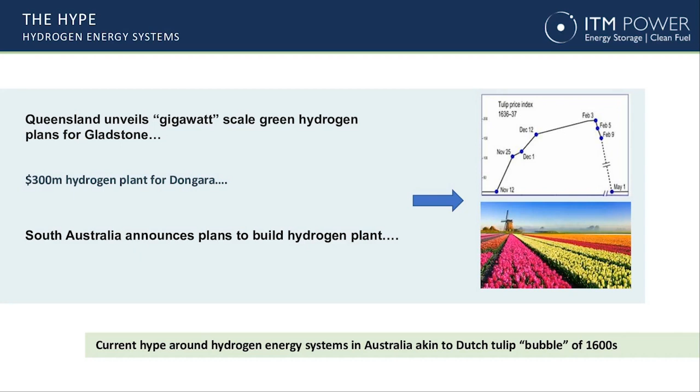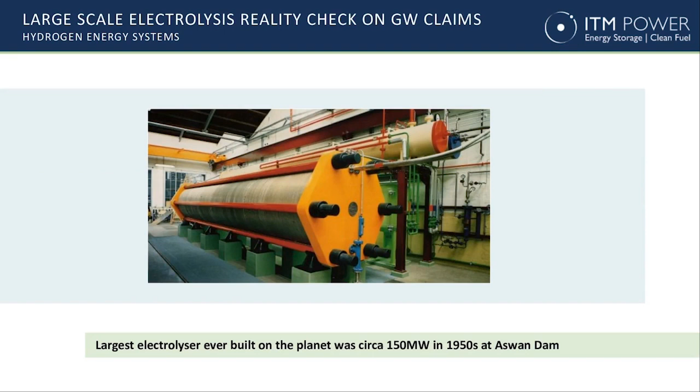Quick introduction: we're now part of the Linde Gas group as of 3 October last year, so we're proud to be part of the Linde family, which also includes BOC Australia. One of the things I want to say up front: there's been so much hype around hydrogen in the Australian market that we need to calm down a bit and take stock of what's really happening in Europe and USA, and learn from best practice. Let's not get carried away, as we've done in some of the press recently, about gigawatt scale projects, which frankly aren't feasible at the moment. In fact, the last gigawatt, or anything close to hundreds of megawatts, was actually developed in the 1950s - an alkaline electrolyzer at the Aswan Dam. So please take note of that, ladies and gentlemen.

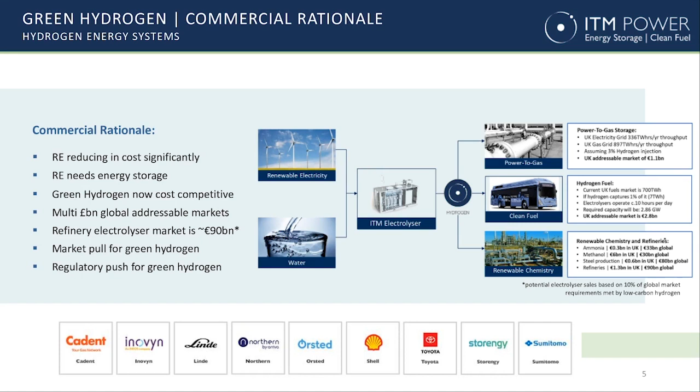What do we do? We make the white box shown in the middle of that slide, and we're pleased to make that equipment for people such as Toyota, Shell, and others around the world. There are very high standards in the oil and gas industry we have to meet for producing hydrogen on site through electrolysis. Basically, we're taking renewable energy and wastewater, preferably, and turning it into hydrogen gas, as well as oxygen and waste heat. We do 3 things with that: we generally put it into gas networks to decarbonise natural gas; we use it in our mobility fleets - cars, trucks, buses, ferries, and I believe Linde Aviation shortly; and renewable chemistry, using it to make other chemicals such as ammonia. As I said, we've been working in this industry for clients like Shell for 2 decades.

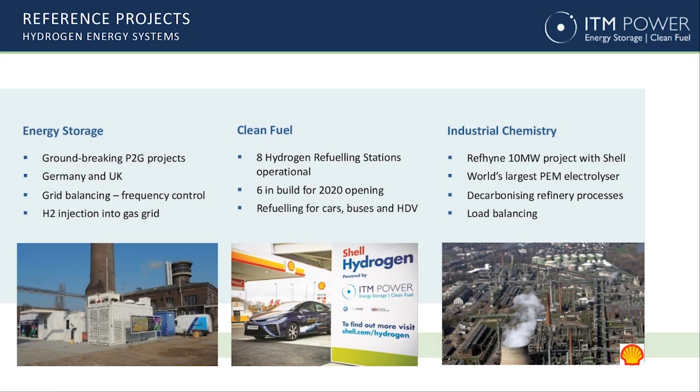I guess the first decade was about R&D and the second decade was about commercialisation. So again, we've got reference sites around the world in power to gas on forecourt refuelling stations, and now the largest electrolyzers in the world at the Shell Wesseling Refinery in Germany.

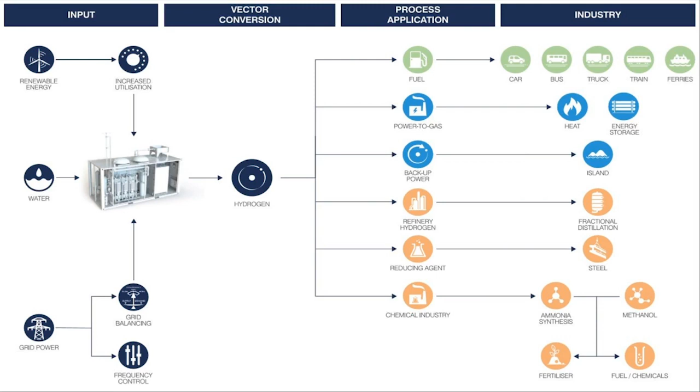This slide gives you an idea. People refer to hydrogen as the vector coupling molecule. Unlike an electron, we can reach a lot of industries and decarbonise and also help with the economics of those industries. As I said, we were part of the Linde Gas Group as of October last year, and thanks to their investment, we're building the world's largest electrolyser factory that I would invite you all to post-COVID for the launch. But at the moment, we're all stuck in Sheffield, and that's manufacturing around 1 gigawatt of PEM electrolysers a year. So Chief Exec Graham Cooley wasn't to be outdone by Elon Musk, so that's our gigafactory.

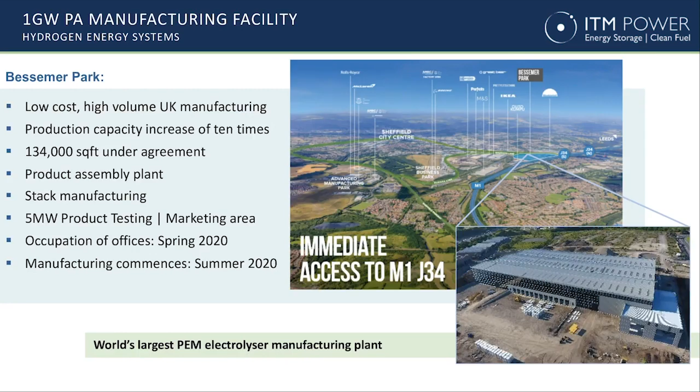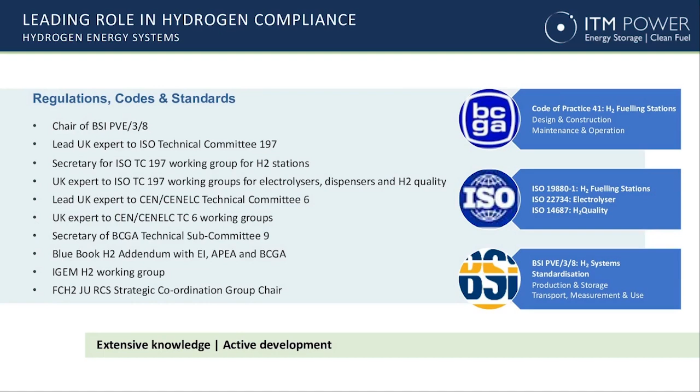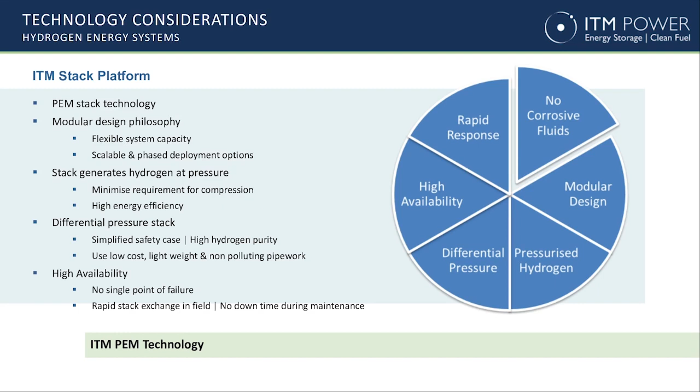I'm very proud of the work that our colleagues are doing, not only here in Australia but also internationally, working on various codes and standards to make sure that hydrogen is deployed safely, both in industrial and public domain. One of the things I found researching this area for about 6 years as part of my PhD was that this particular technology is quite innovative in terms of its ability to turn on and off rapidly and basically be used in a safe manner for scale up, ultimately to gigawatt scale.

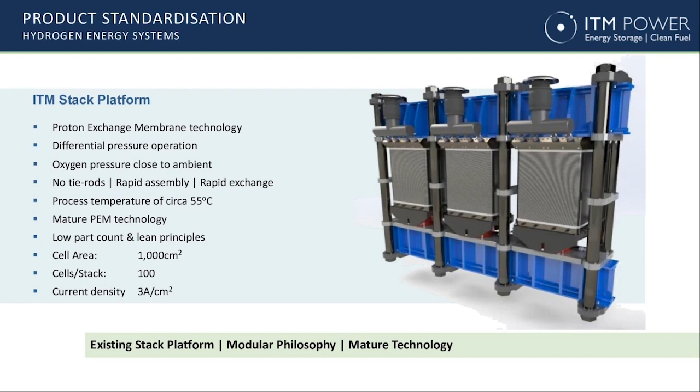This stack image gives you an idea of how compact this is. That's a stack that fits into a 10-foot ISO container. So in the space of 1 decade, they've moved from 10 kilowatts in that footprint to basically 2 megawatts in that footprint. So like solar panels, electrolysis has rapidly increased its current density over that last 10-year period.

Now that it's got to a point of commercialisation, these units indicated here have actually been deployed. I'll talk shortly about Australia, but in Melbourne at Toyota Altona and at Brisbane in the BOC Bulwer refinery near the Eagle Farm Airport.

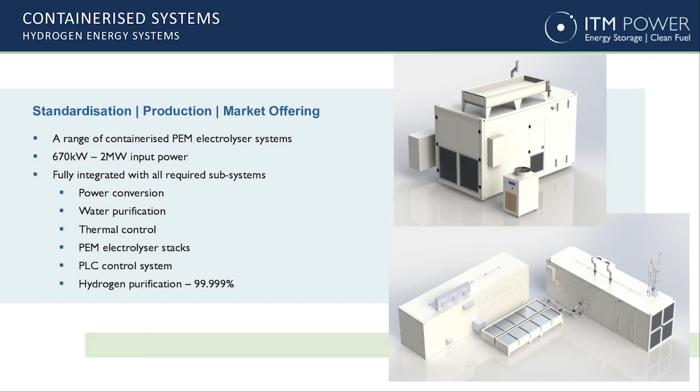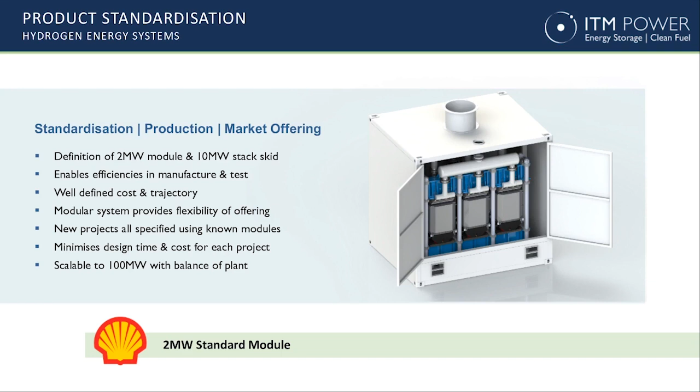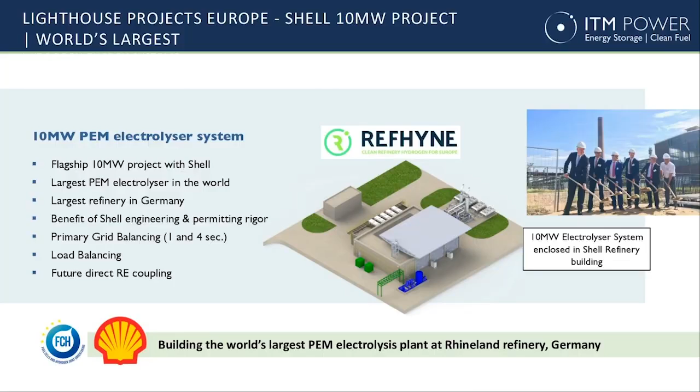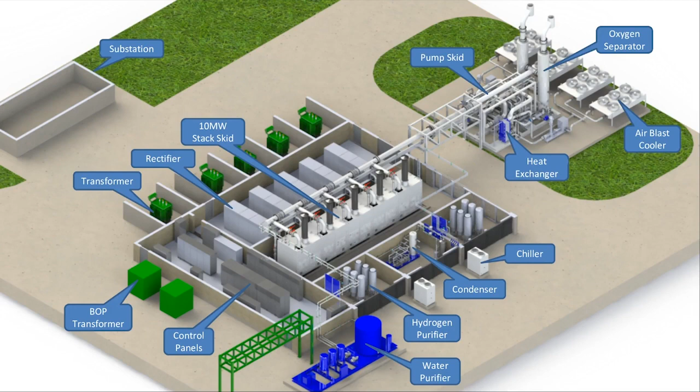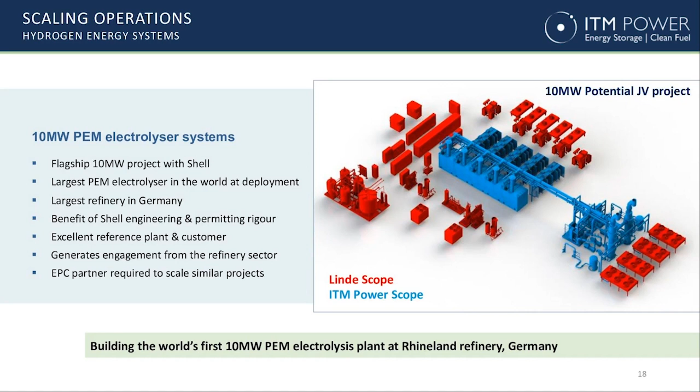This gives you an exploded view of the configuration of the Shell refinery, with the 10 megawatt units made up of 5 2 megawatt modules shown there in the centre, and then all the balance of plant is external. So as we move up from 2 megawatts in capacity to the larger 10 megawatts, it's an external balance of plant rather than built in. Where we play is in the centre section there in blue, where we're manufacturing the PEM electrolysers, and our partner Linde is making the balance of plant, so deoxy, drying, and also electrical conversion equipment.

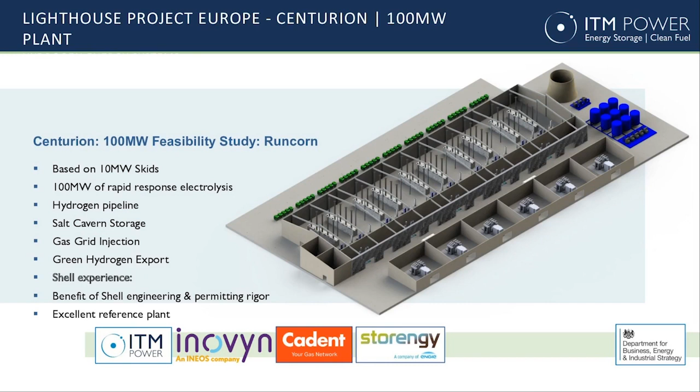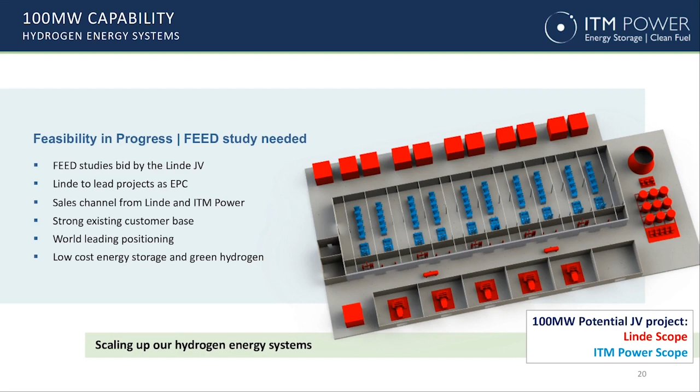Now that we've passed the 10 megawatt mark, we're up to 100 megawatt. There's a number of projects: the Runcorn project, power to gas injection, storing hydrogen gas in a salt cavern, and similarly happening in British Columbia off hydropower, so at the 100 megawatt level. And again, we stick to the knitting - ITM manufactures the PEM electrolysers shown in blue, and Linde takes care of the balance of plant.

As I mentioned earlier, the good thing about PEM electrolysis as compared to traditional alkaline electrolysis is we can turn it on and off in under a second. This has market benefits for the national electricity market here in Australia, and certainly works to allow greater penetration of lower cost renewables, so more wind, more solar, without upsetting the balance on the grid. So a very useful characteristic for the national electricity market moving forward.

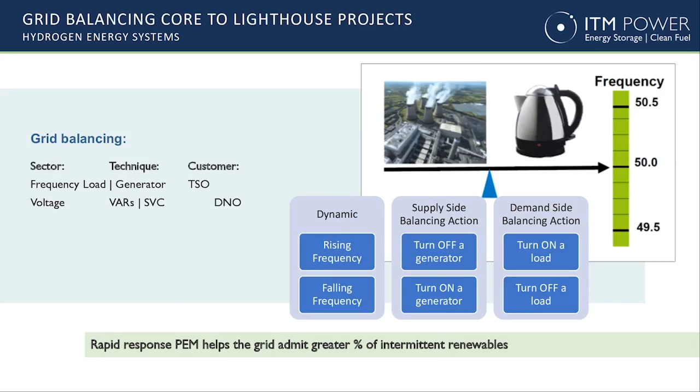In fact, all of the projects that we've developed, both in the United Kingdom, Europe, and now in Australia, are connected to the electricity market for grid services. So that creates another stream of revenue for the operator to offset the cost of producing the hydrogen in the first instance. And one of the other interesting things is we've seen some projects here in Australia, the Tonsley Park project with AGIG, the Jemena H2GO project in New South Wales, and also the ATCO project in Jandakot, Western Australia, where they're starting to look at how to inject hydrogen gas into the gas network.

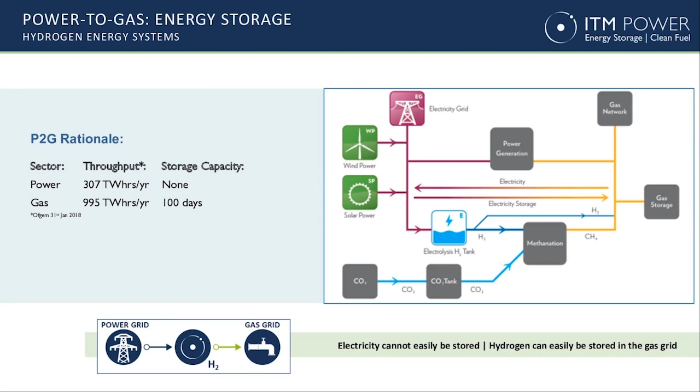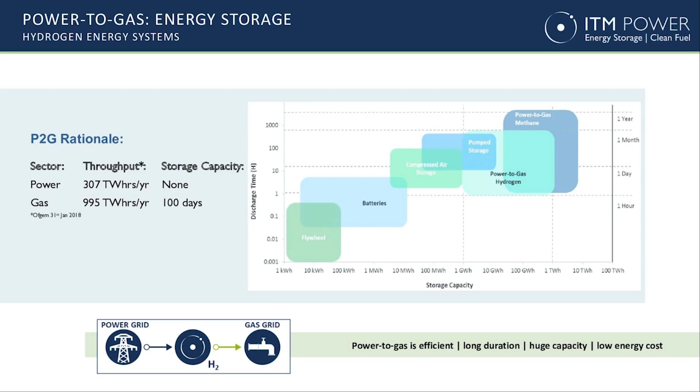Finkel and the COAG team with the federal government are looking at a 10% injection rate. One of the nice things about gas is that it can store energy for the long term. As opposed to a battery which stores energy for half an hour, hydrogen gas stores energy over weeks, days, months, years. All of the power-to-gas projects in Europe are now heading towards a 20% decarbonisation target, and ultimately 100% hydrogen gas.

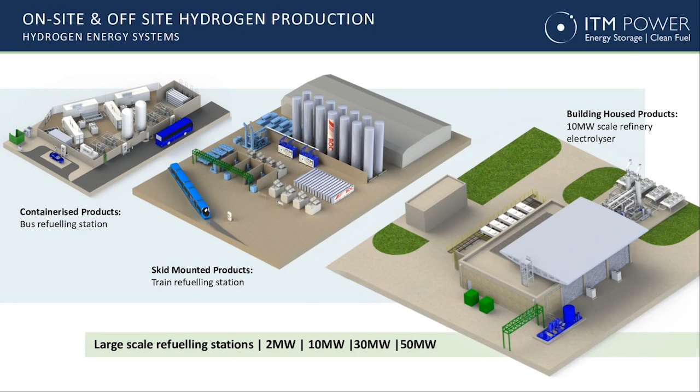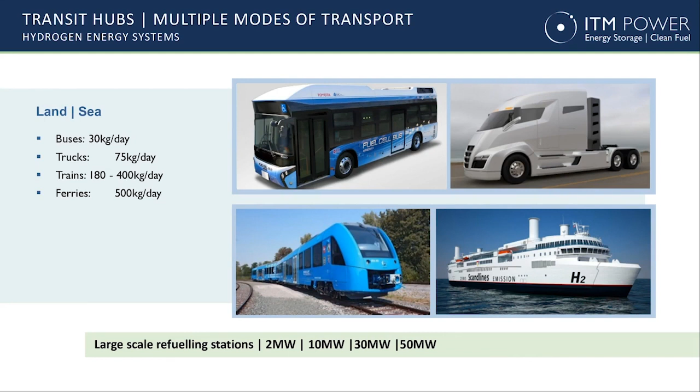If you scale up, we're starting to work now in trains and buses. We recently launched a bus program here in Australia, a network of 100 fuel cell buses across Australia, so that'll be coming to a capital city near you. We're also starting to move up into trains, and ultimately ferries are starting to happen around the world with hydrogen fuel cells.

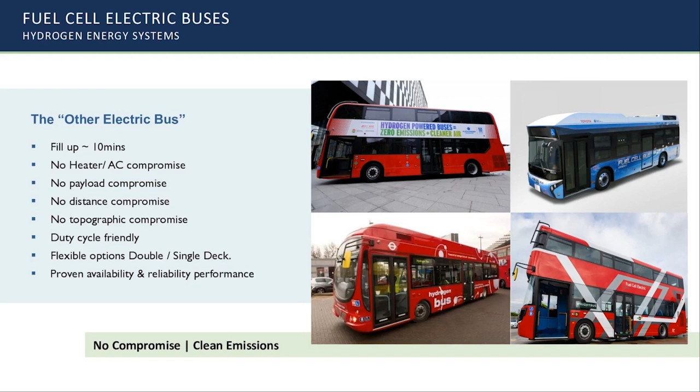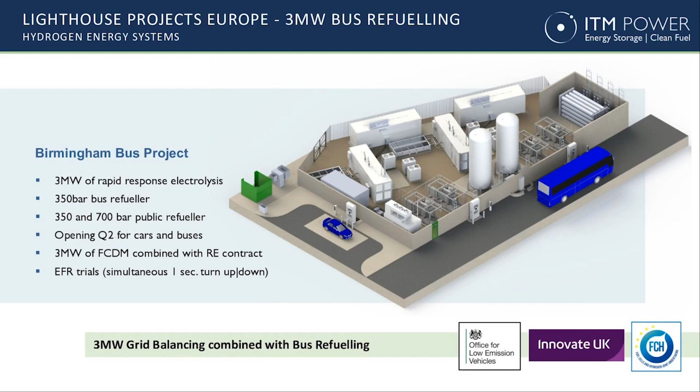Buses is where we started in London. We've now released the bus program, and in New South Wales the state government has committed to transitioning all 8,000 public buses to battery electric and hydrogen fuel cell buses. Very exciting in New South Wales. Ultimately we seek to look at this as a public refuelling station as well, amortising the cost of those assets across the bus and car fleet.

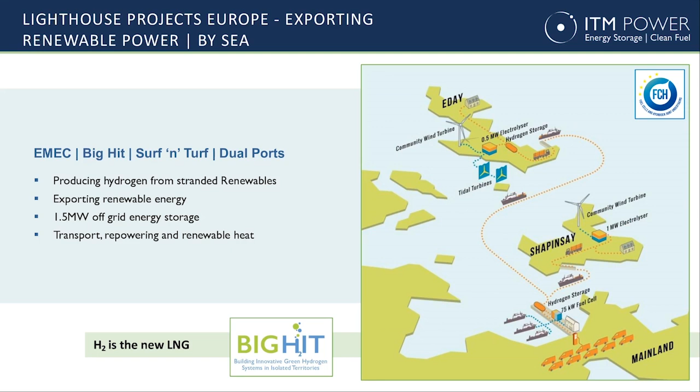Some of the work we've done in Scotland has implications. There's a new project announced up in the Daintree, heading towards a microgrid for hydrogen. Similarly, we're using stranded wind power in the islands across the north of Scotland to convert to hydrogen and ship that hydrogen to other islands for reuse in a fuel cell stack and in mobility for fuel cell vans.

I mentioned earlier the first project in Australia undertaken with Toyota. This is the Toyota Altona plant, the new Centre of Excellence for future mobility. You'll shortly see announcements where you can go and have a look at hydrogen forklifts, cars, trucks, buses. That's really Toyota's contribution to the world as part of the Olympics next year.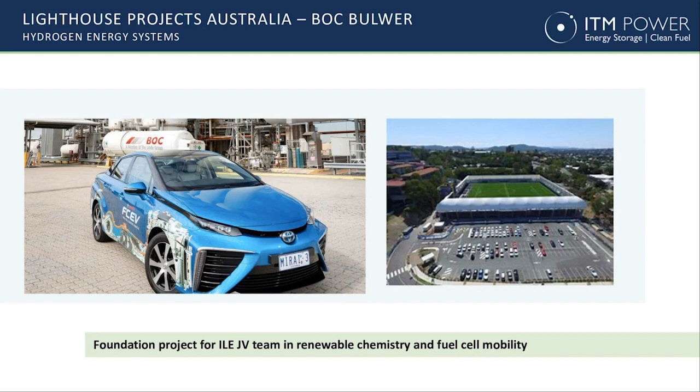Closer to home here in Queensland, QUT in conjunction with BOC and the Queensland Government is installing a hydrogen refuelling station at the Kelvin Grove campus, and I hope that goes in very soon because then I can start to refuel my Hyundai Nexo when it arrives.

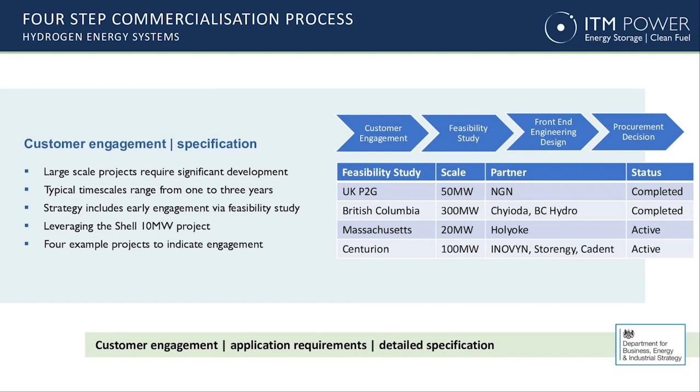We've made a lot of noise about engineering, working with Linde and local partners here. We have a very specific 4-step project to make sure we have a commercially successful and also very safe project. We'd like to think our clients here in Australia can follow suit and take a 1 to 3 year time frame to make sure these projects are commercially, technically, and from a public safety viewpoint successful.

So our recommendations: certainly talk to all stakeholders - interesting to hear some of our colleagues from the water utilities, we certainly want your wastewater for future hydrogen projects. It's very important that it's socially acceptable. We want to explore all opportunities in projects across power-to-gas injection, mobility for buses, trucks and vehicles, and any benefits we can derive from helping with grid stability.

When we originally did this seminar jointly with Engineers Australia and IChemE, we wanted to make sure trusted members of the organisation are used for the benefit of funders and insurers. Finally, we don't want to add to the hype. So if anyone's undertaking a hydrogen project, I'd suggest working behind the scenes and getting things sorted out from both a commercial and a technical case viewpoint before any press release is made - that would be greatly appreciated.

Finally, from an investment viewpoint, for projects going forward here in Australia, we prefer to do them as a toll project where we're selling the gas basically as a service, at a $1 per kilo rate, rather than asking clients to invest in projects directly. Money can be spent better on other projects, and we leave it to ourselves and Linde to invest in the projects moving forward. So, quite a tight time frame - hopefully that's 15 minutes, and we'd certainly welcome any questions.

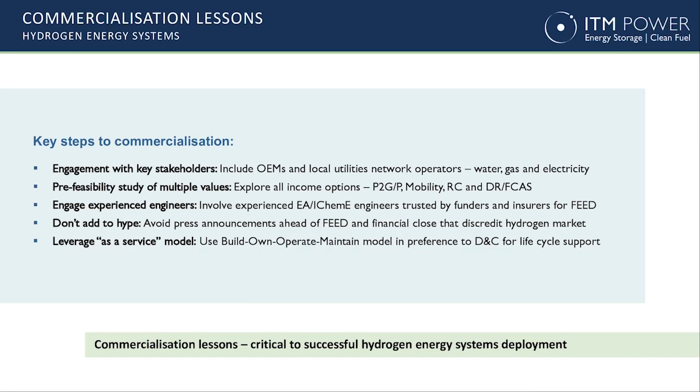Thanks again, Neil. Thank you, Emma. I hope you can all hear me okay. Yes, we can hear you. Would you like to turn on your video? I think I'll keep it off just for the bandwidth, just in case my connectivity is not that good. So I'll carry on. No problem.

Well, thank you very much, and thanks for that talk from Anil. It was quite enlightening on hydrogen. So just to give a bit more context, thanks Emma for the introduction. My background is in the hydrocarbons industry, right from when I graduated up to now, although right at the moment I am actually working in FMCG. But prior to that, pretty much most of my experience has been hydrocarbon. And I was requested to give this talk.

I've been fortunate in that I've worked right across various different hydrocarbon industries in different parts of the world. So the opportunity is to share the evolution of where we are right now in terms of the needs and demands in the energy sector, and also really focusing on emission control and where we're going in the future. As I am very much part and parcel of digital transformation, I also have included the need for us to bring digital into how we think as chemical engineers. So just going back to what I'd like to touch on, right across the board, we're talking about a couple of 20 years back to where we are now.

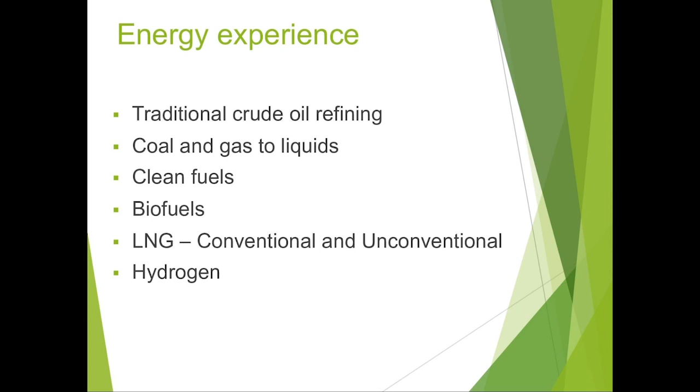Then back in the Australian context, I'll touch on the conventional and unconventional LNG - where do we stand at the moment? And I'll close off with hydrogen, but since we've had a pretty good overview on hydrogen already, I won't touch too much on that - just to give a bit of perspective on where we have come from, what our challenges are, and where we're going with it.

To contextualize the energy landscape, the Paris Agreement really puts a lot of pressure on countries and companies to act responsibly. Right across the board, globally, we see cities, countries taking initiatives, and companies stepping forward to put forward drives towards the 2030, 2050 plan - going not just to carbon neutral, but also carbon positive, which requires quite a decent shift in thinking on the energy landscape across the board.

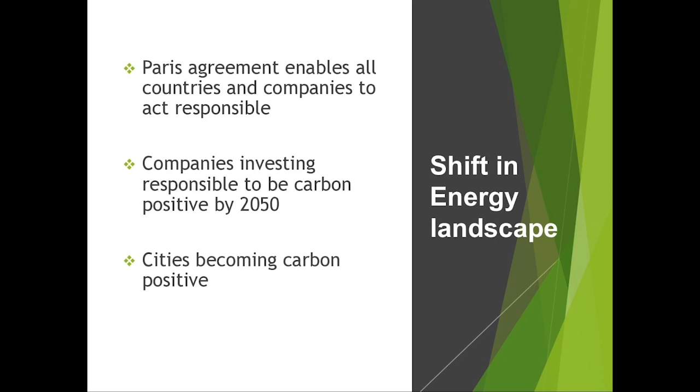Summarizing what I see as the hydrocarbon span based on my experience working in different industries, I'll start with what is quite common for the Australian context, which is the conventional and unconventional LNG producers. As we know, we are a big exporter, and all the producers right across the east and west coast are exporting across to Asia.

However, while unconventional coal seam gas production has streamed quite rapidly, there's still a question and quite a bit of debate about whether it's going to be continuously feasible as an economical solution, when it comes to how many extra wells you need to drill for coal seam gas versus conventional gas. So that continues to be a debate.

I think there is still an opportunity to really bring about more cost-effective conventional production, and I'll touch more on what I see as the digital twin. This is where it's important as chemical engineers to really step back and start to use the power of digital transformation, using analytics to really optimize our operations, sweat the assets, because we do have what we have.

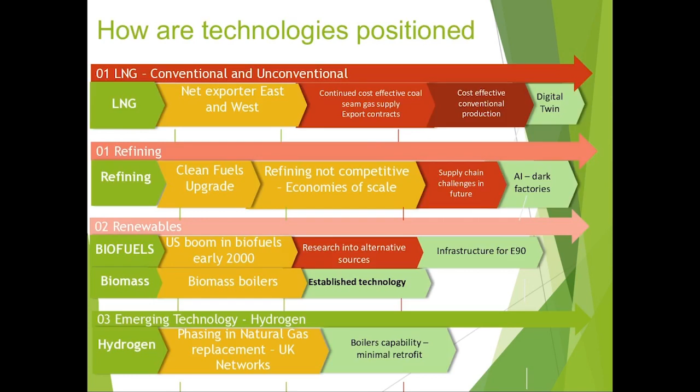In closing comments, I'd really like to touch on one of the important aspects of how chemical engineering needs to adapt to be at the forefront of digital transformation. As the world is moving forward in digital transformation, it's a very important part of how we need to think, adapt, and learn to fit in with the world of data analytics, and three key important roles in the energy sectors.

One is to continue to innovate in parts of the world like the hydrogen industries, to sweat our assets, and this is where a lot of our operators have gone down the path of doing digital twins, which allows more data streaming, allows data to be processed into the cloud, whether it's maintenance related or process related. It allows so much opportunity to optimize, do deep analytics to find opportunities where you might not see opportunities for energy optimization. So all of those perspectives of things that were not actually available to all of us are available through digital transformation, and all of us need to upskill ourselves and think about this all the time.

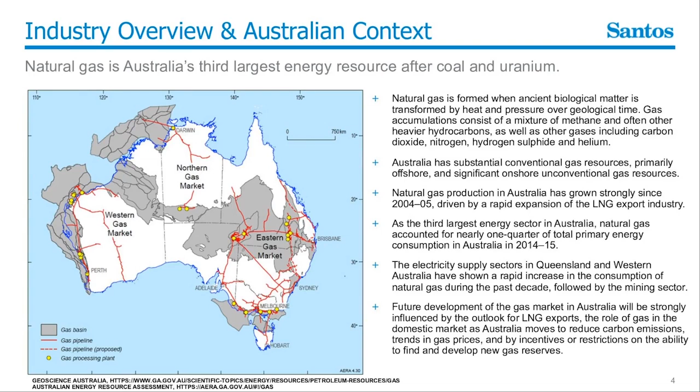So, about Santos - it's an Australian company, 65 years now in the making. The first onshore gas discoveries in Australia out of the Cooper Basin. It has the desire and aim to be Australia's leading domestic gas supplier. We work in all of the domestic markets, both eastern seaboard, western seaboard, and the northern part of Australia, onshore and offshore.

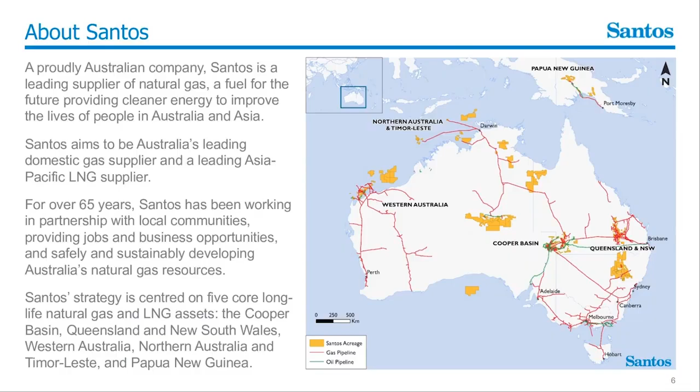So a quick overview of those 5 core assets. Western Australian assets are predominantly focused on the Varanus Island and Devil Creek gas plants, operating both domestic gas there, and also we have an offshore oil operation in the Ningaloo Vision FPSO. Looking to do some significant expansion work as well in the Bedout Basin off the coast of WA.

Cooper Basin, the underpinning asset of Santos, where the company started, predominantly focused around the Moomba gas plant and the associated reservoirs and operations from there. Cooper Basin is an interesting operation - tight gas conventional, so it produces both gas and liquids products. Those liquids products head south and are exported from Port Bonython to various refineries or chemical users around Southeast Asia. In Queensland and New South Wales, we have, as Liz previously talked about, one of the unconventional LNG operations in the GLNG plant - again an unconventional coal seam gas operation to LNG, exporting again to Southeast Asia.

Recent acquisition by Santos in Darwin, the ConocoPhillips operations from the Darwin LNG plant and the offshore Bayu-Undan facility and platforms. We've taken operatorship of that through those acquisitions recently.

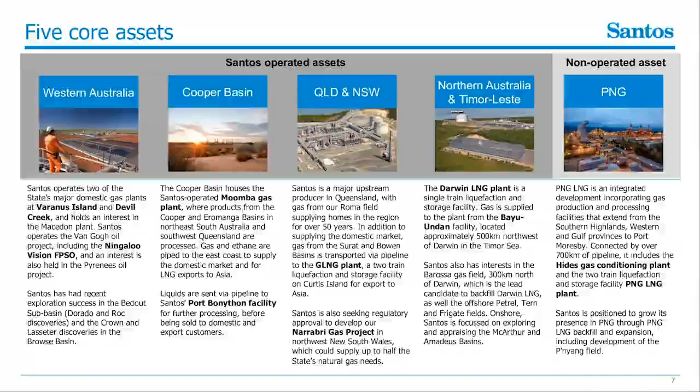Santos has a non-operated asset position in Papua New Guinea in the PNG LNG operation, which is operated by Exxon. That consists of the Hides gas plant in the upstream and then the LNG plant down near Port Moresby, where we export predominantly to Japanese and Chinese customers. So that's Santos in a bit of a snapshot.

I suppose about me - this is just a quick overview about myself. Born in Dublin, my family are Irish. I'm married with 4 children, educated at Adelaide Uni doing ChemEng, and I've got some hobbies and interests, but there's some photos of me and the family.

So I am a real person. I'm not just a robot.

My career and education - this is a bit of a pictorial demonstration of my career and all the various roles I've had since finishing high school to currently, across a range of companies and geographies, and a couple of industries as well in the early days. But probably the key takeaway from this has been it's been a pretty non-linear career path, certainly not following what I thought it was going to be when I left university.

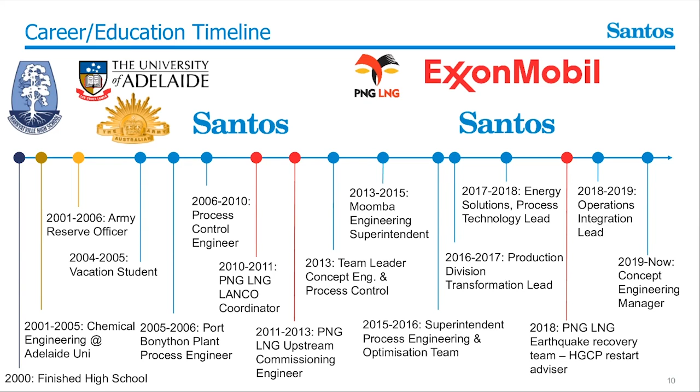So just very quickly going over the key takeaways. My early career, foundation career, working as a plant engineer or a process control and optimization engineer. So a lot of focus on efficiency, optimization, fuel usage, product spec optimization, and those sorts of things, with a focus on reducing footprint and enhancing efficiency.

I spent the first 5 years or so of my career doing that. I was then very lucky to get an opportunity to go to Papua New Guinea and work on the PNG LNG project, which is probably a really interesting one - working on a mega project with $18 billion of spend, or I think it ended up being nearly 19 by the time it was done. It was a significant expenditure and a significant amount of work that was undertaken.

We had, I think at the peak of construction, nearly 11,000 - don't quote me on the number, but I think it was nearly 11,000 across all the operating sites during the peak of construction. If you think about that, that's the size of a small country town. And as a consequence, all the infrastructure that has to go in with building that - it's not just putting the steel on the ground, but also having little mini towns or camps, airfields, logistics transport routes, and all those sort of things. Then also with Papua New Guinea, the geography - very, very challenged geography, remote locations, minimal infrastructure.

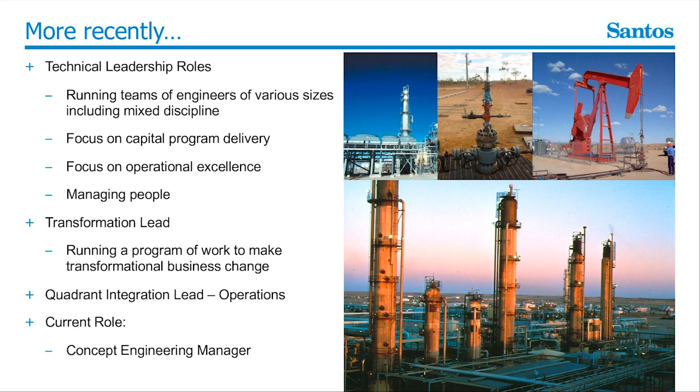On top of that, we've just entered FEED engineering design for a carbon capture and storage project at Moomba, where we plan to capture the CO2 emissions from that facility and inject them into depleted reservoirs. So that's quite an exciting project. Look forward to seeing that one get done.

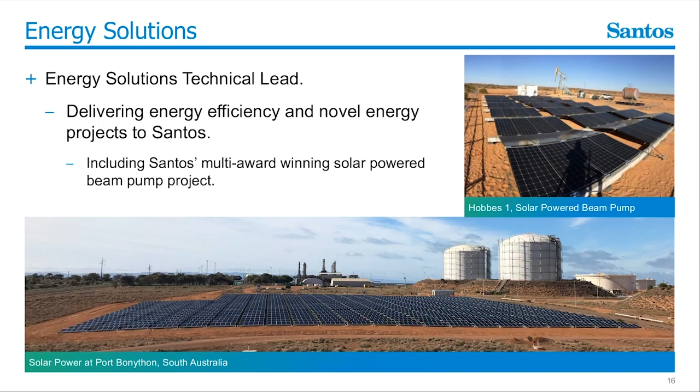It's not all normal though, and it's not all sort of planned work. This is another little project I had involved with. I got a phone call in March, after a large earthquake hit the Hides gas plant that we obviously helped build.

So that's basically the summary of that little thing. But that was just one of those weird and wonderful things where three months of your life goes past on the basis of a phone call that you weren't really expecting.

And that's me kind of done in a lightning round.